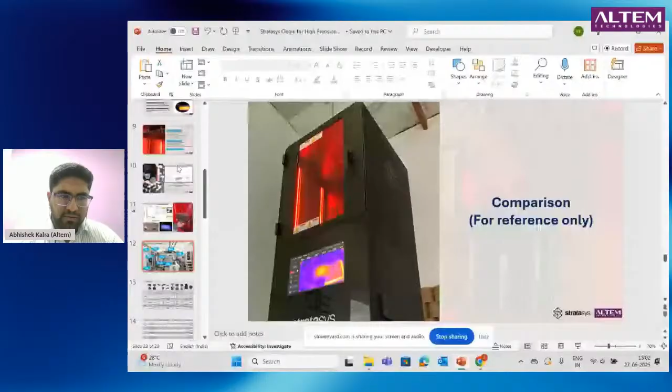All right. So typically, 3D printing or additive manufacturing has always been considered as a prototyping tool. What that means is that product designers or product engineers, before they start thinking about manufacturing and while they are still in their design iteration stage, would use 3D printing to build prototypes of these parts, concept replicas of these parts, and essentially they will look at it, analyze the look, feel, and to some extent the performance of the part, and then take a decision whether to go into molds or not.

But the industry's demand is changing, and it's changing in a few different ways. First, mass customization is the key, which means that customers are demanding a variety of products, and the pressure of bringing your product faster to the market is more than it was ever before. Second thing is that a lot of applications have emerged which cannot justify the cost of tooling. There are applications which would require customers to build 20,000 parts or 30,000 parts or even 50,000 parts, which might be prohibitive for tooling, because the cost of making a tool runs into lakhs of rupees, sometimes tens of lakhs of rupees, and the time can go up to 6 to 8 weeks.

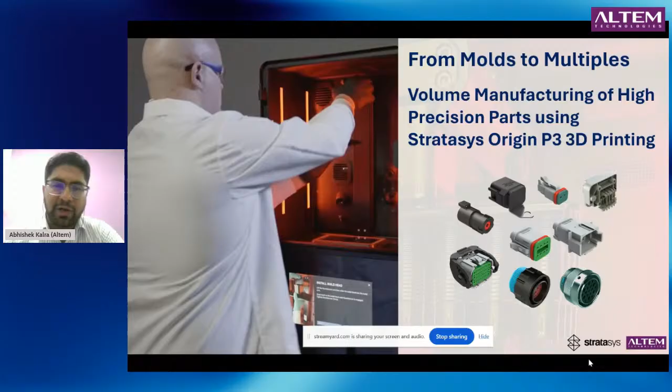So if your customer orders 300 parts, you can build 300 parts, and it doesn't matter whether you build 20 parts or 300 or 3000, the cost per part is going to remain the same.

So before we jump into what the machine does, how the technology works, and what are some of the benefits of using a technology like this and how cost effective it is to use, a little bit of introduction about us.

Altem has been a full stack, end-to-end engineering services provider for the last 15 years. We are in our 15th year of operation, and over this time we have joined hands with multiple global OEMs to help customers like you go from art to part, from concept to final manufacturing.

We have solutions which enable customers to do complete design development, analysis, reverse engineering, and then 3D printing in polymers and metals.

One of them is Stratasys, which is one of the companies that essentially invented 3D printing and is leading the revolution of taking 3D printing from a concept-stage prototype technology to a full scale production grade technology.

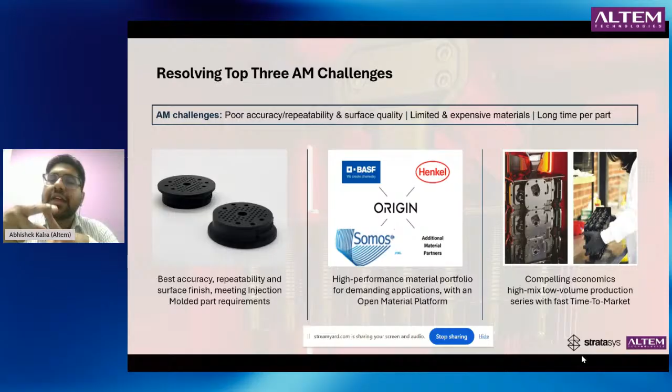And the third thing, which is very important, is compelling economics, which allows you to make the decision of building parts in 3D printing as opposed to going to injection molding, because you get the same quality, same properties, and more importantly, the same cost or similar cost and time benefits that you get with traditional manufacturing.

I will play a short video which just gives you a basic overview of the machine.

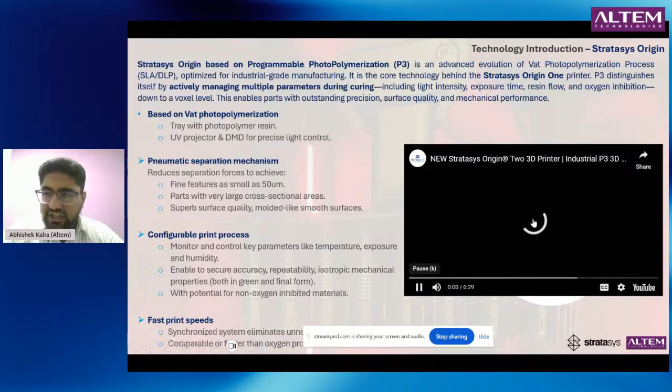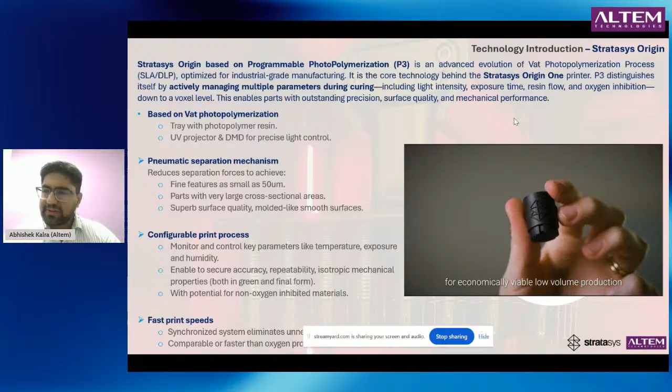Introducing Origin 2 3D printing solution, where repeatability meets unmatched accuracy, a true injection molding alternative for economically viable low-volume production. One printer, infinite applications, every industry. Stratasys Origin 2, precision manufacturing, redefined.

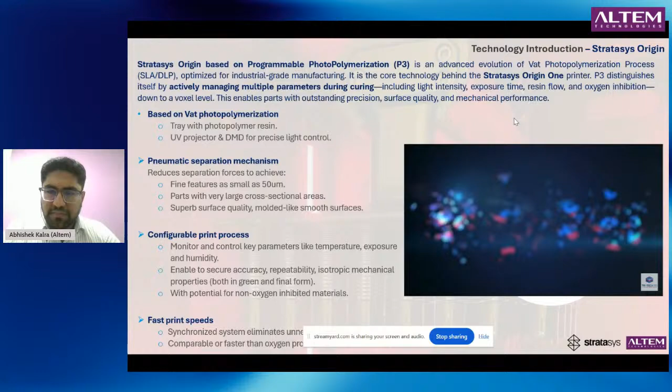All right, so that gives you a little bit of a gist of how the technology works. Essentially, as many of you may know, resin 3D printing or DLP 3D printing - the programmable photopolymerization methodology is an addition or an upgrade to the typical standard DLP.

And for those of you who know DLP or not, DLP printers are great because they can produce very good looking parts, but they are generally suitable only for prototyping because, A, it's slow - it's generally a fast technology, but it is slow as compared to what the industry calls production standards. Second, the number of raw materials is very limited to basic materials because DLPs are typically low cost processes. And third, a lack of repeatability. So it's great for prototyping, but not so good for production.

And number four is parts changing physical mechanical properties over time. So you measure a DLP part today, it'll be, let's say, with an accuracy of 50 microns, and 3 months later, because of the atmosphere itself, it would have warped or deformed.

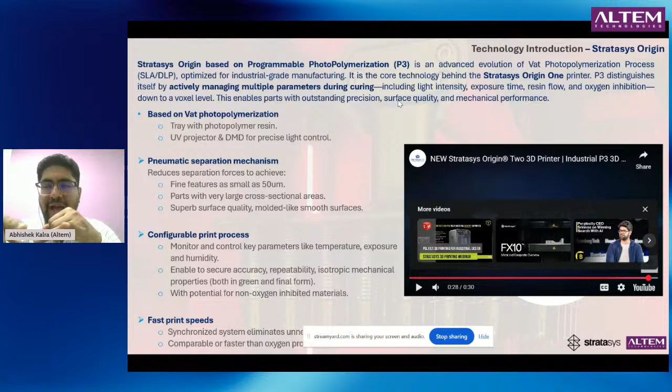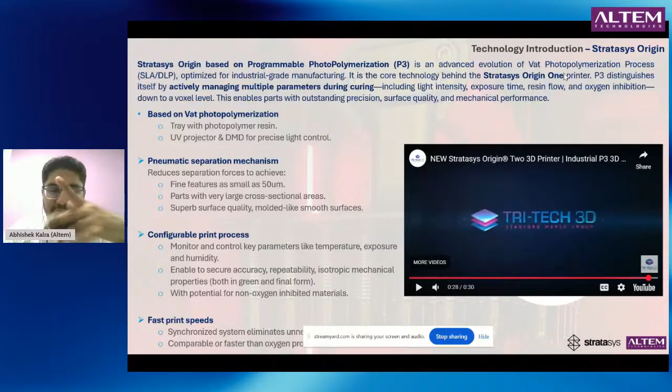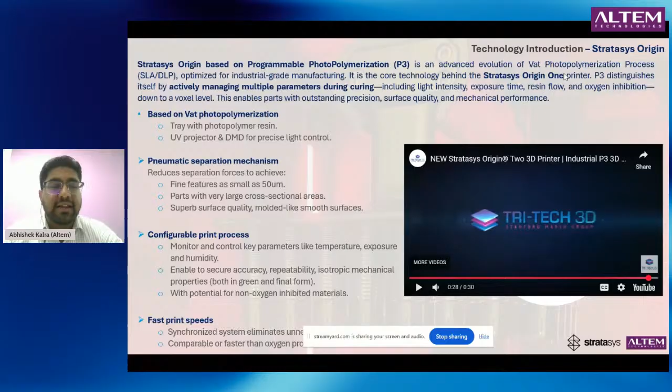Origin allows you to essentially take the benefit of a DLP process, which uses resin material to produce high surface finish parts. But due to its process control and heat control inside the chamber, Origin allows customers to build parts in 50 plus different types of materials that are known today, which includes materials with temperature capabilities of close to 400 degrees centigrade, ceramic infused materials, carbon fiber based materials, as well as injection molded quality close to 50 micron accuracy and close to 3 micron resolution.

What we do differently as compared to traditional DLP systems or traditional SLA systems is build a lot of process control, which is what Stratasys is famous for. So we could make the chamber of the printer absolutely inert, which allows us to build parts with much more sensitive materials, unlocking potential for non-acrylic chemistries.

So those of you who know DLP, people are only able to use acrylic-based materials. We can control the chamber process and the bed chamber, meaning we can heat up the build chamber in which the parts are printing to a level that we want, as well as gradually increase or create a temperature gradient.

We can manipulate exposure time, that is the duration of time for which the image is being projected onto the resin, and we can manipulate the delay settings in the software. We have a lot of built-in sensors which measure the complete properties of the chamber and make sure that every layer is printed perfectly so that the next layer is printed perfectly, and so on and so forth.

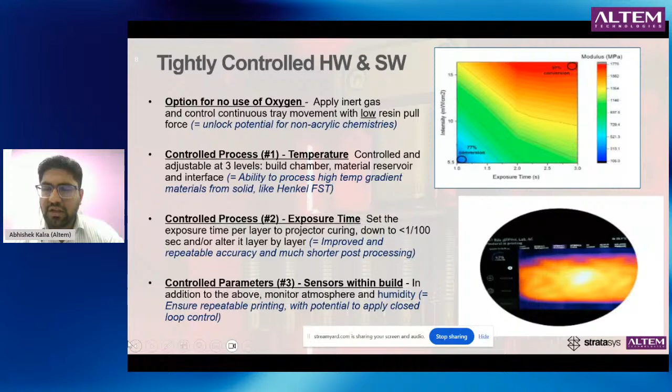Using this process we can create parts with surface finish of close to 3 micron RA, which is very close to injection molded finish, as well as create very tiny features, very tiny textures, but all the way up to large parts without any type of warpage.

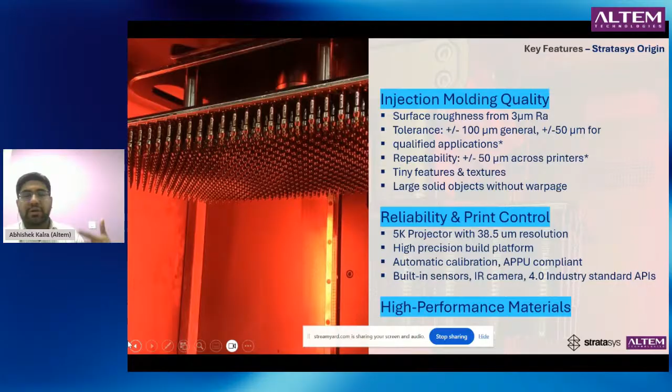And we are not just saying this, we have got ISO certifications done on this process. You can access from our website a document which shows repeatability studies of this platform, which allows it to build consistent parts across builds, across different positions at the build, and across machines.

So whether you print a part on the left corner of the machine and the same part printing on the center of another machine, and the third one on the right corner of a third machine, they will all measure the same up to 98.5% across build platforms and about 93% across printers.

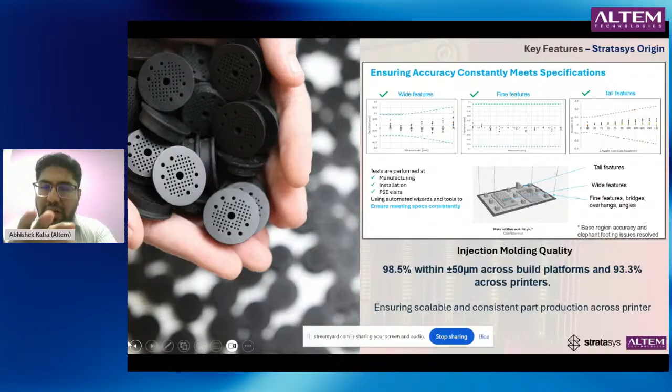We are one of the only people in the industry who are able to achieve this level of repeatability, so that when you as customers give 10,000 parts to your customers, you know all the parts are performing well, and they are performing well always.

What we are able to do is take the benefit of the fact that we can produce injection molded level quantities, and also give you injection mold level materials. Today on the Origin platform we have close to 40 different materials readily available between us, that is Stratasys, and some of our material partners, such as Henkel, Somos, BASF, which is now called Forward AM.

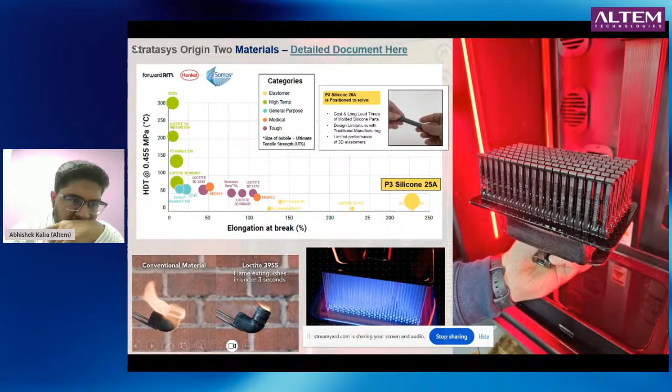You can see on this graph we have some basic materials which are biocompatible in nature, all the way up to this material called 3955 from Henkel, which is an FST approved, fire resistant, aerospace grade material.

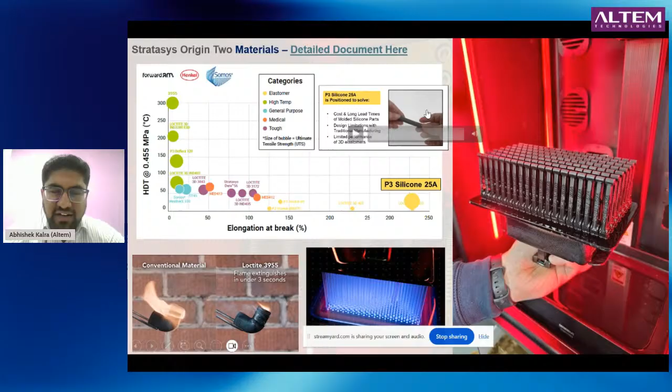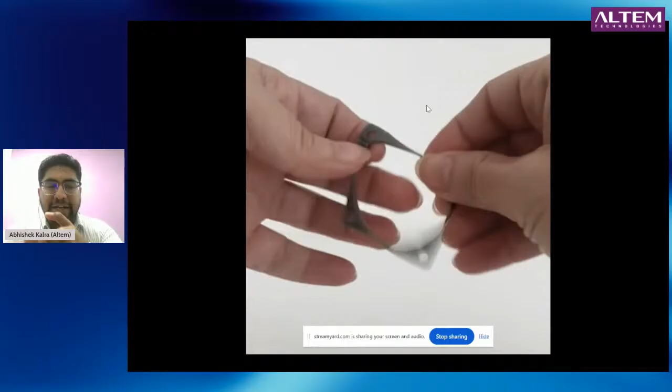We are also launching this month the world's only and pure true silicone material, not silicone-like, not silicone-mimicking, purely silicone, which can give you some very interesting results. I'll play a video, you'll start to see it on your screen in just a minute. We are able to print ultra-soft flexible parts, also biocompatible in nature, which allows you to create things with silicone that are typically very difficult using injection molding.

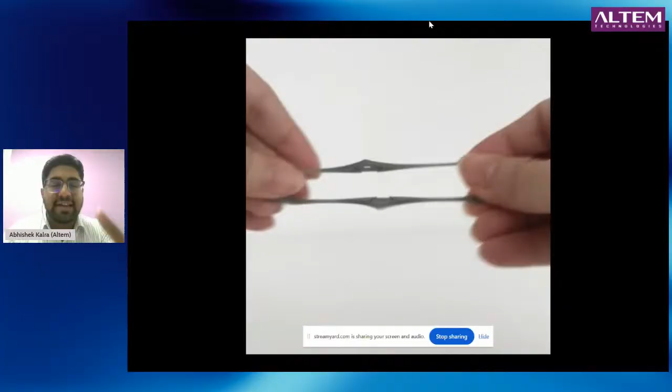So if I want to make 20 parts, 50 parts, or even 5,000 parts, I can just stack them on the build platform and start using my parts from the same day or the next day onwards.

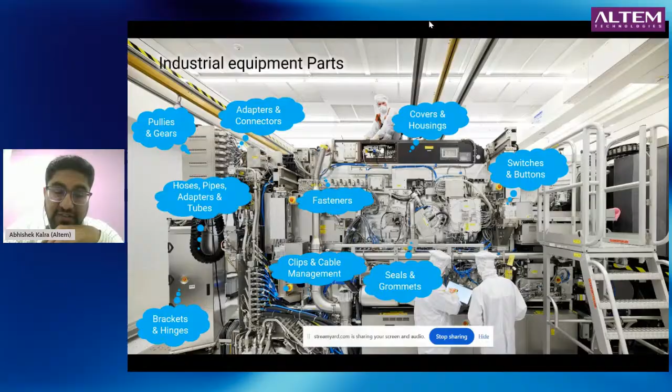Using this, any typical scenario you might expect in a product or process, such as this image of a typical factory showing brackets and hinges, hose pipes, adapters and tubes, pulleys and gears, connectors, fasteners, cable management systems, switches and buttons, can all be directly 3D printed.

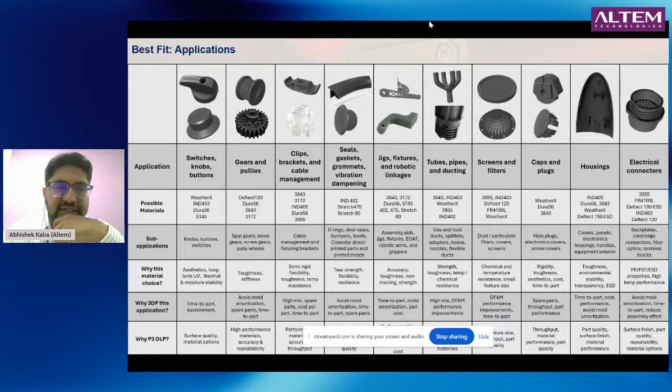We found some key applications, and these applications are typically possible with a wide variety of materials. So if you go on our website, and we'll put links in the description, you will find a list of materials and what properties those materials offer, and more importantly, what materials they are similar to.

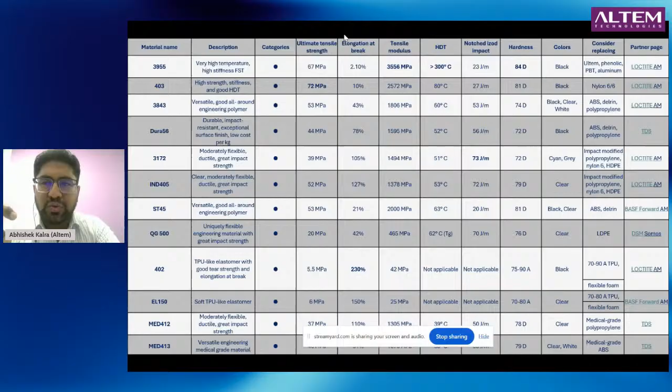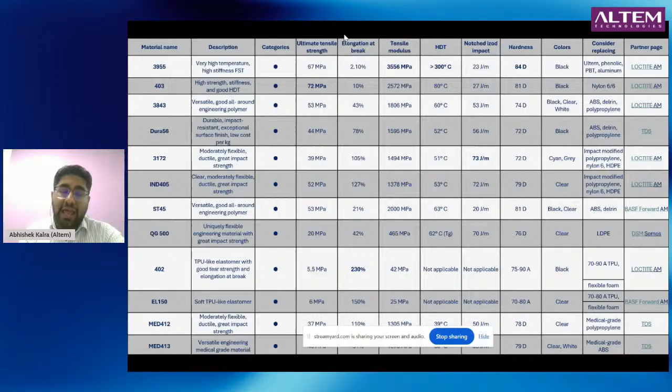For example, 3955 is similar to Ultem or PBT, and if you talk about stiffness to weight and strength to weight ratio, it can even give you better performance than aluminium. Origin gives you access not only to materials developed by Stratasys, but also to materials developed by larger third-party suppliers.

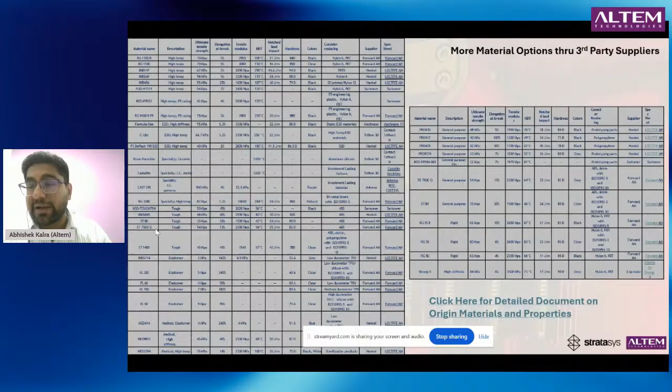It's a very complex slide, but we have companies like Henkel, BASF, and Forward AM, who are developing tens and up to hundreds of materials, including biocompatible materials, castable materials, and of course carbon fiber and fire resistant based materials, which can be used on the platform to build parts with the characteristics that you and your customers want.

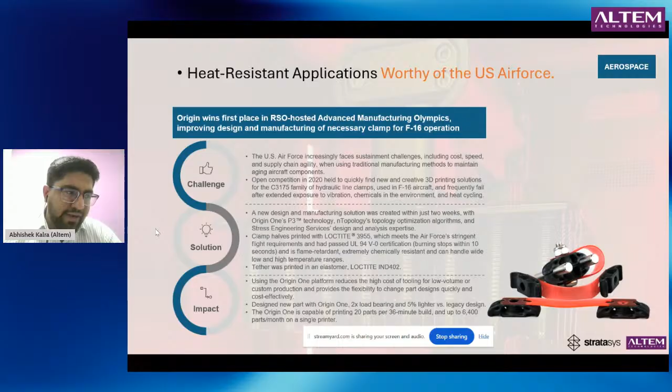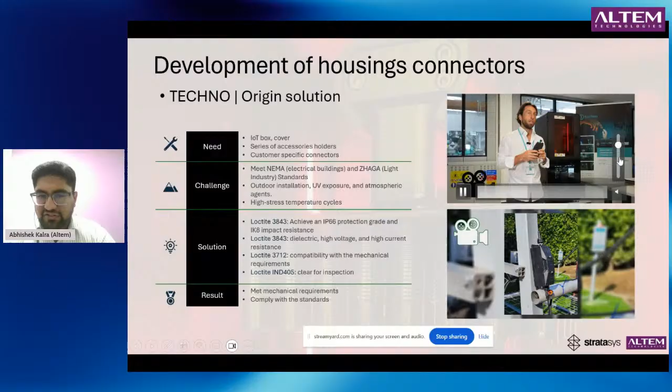We have success stories from aerospace, where we already have FST grade UL94 V0, that is fire resistant materials, directly available. As well as, if you look at this video from a connectors manufacturer, you can see how precise connectors are manufactured straight out of the Origin machine and used directly in the process.

And remember, these parts are as strong as it can get, compared to injection molded plastic or even machined plastic, and the parts will last you for the entirety of their life.

Now I've been talking about how you can build this in very large volumes, so let's try to quantify the large volume. I've taken a simple example of a connector, which is a very small but very complex geometry, about an inch by inch part.

As you can see, we can fit close to 400 parts on the build plate. If you can see my camera, this is how the build plate typically looks. You can stack parts on top of each other by putting some minimal supports on top, and that's how you can utilize the complete build volume, which is a good 400 height of the printer.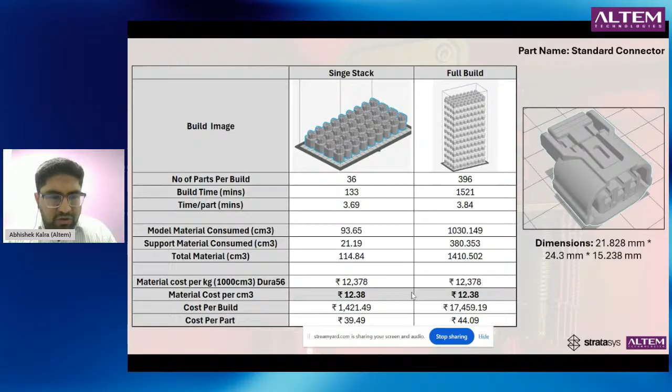And if you notice, the time taken per part is less than 4 minutes. The cost per part could vary depending upon the material, but using a general purpose high flexibility prototyping material, we are able to build this part for about 40 rupees. So it's a very compelling economics when you don't have to invest in tooling, you don't have to invest in labor, and you don't have to wait 6 weeks for your parts to get ready. Just imagine, it takes 400 parts in about 12 hours.

You can build 800 parts per day, or some 12,000, 24,000 parts per month, and so forth. This is the amount of volume you can build, and this could also mean you're replacing parts till the time your injection molds are getting ready, which will give you tens of lakhs of parts. You can build the first 20,000, 30,000, 50,000 parts on the injection mold.

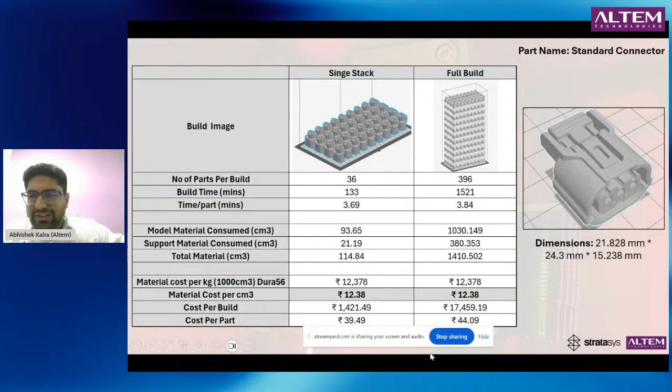Or you have a customer who is looking for a small order, because maybe they are trying out a new product or a new market, or it's a startup. You can build high precision parts, and every part on the stack will have the same level of repeatability.

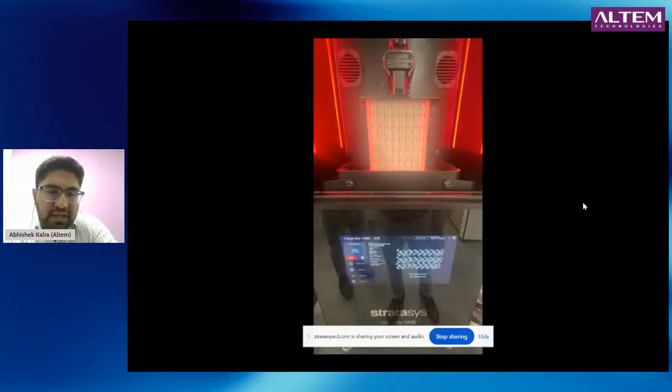As you can see from the video, it should be up on your screen if it's not just yet, showing how these parts are building inside the platform.

Very beautifully done. It takes about 12 to 14 hours to finish this job, and at the end of 14 hours, you can have close to 400 parts with you, which are ready for deployment, ready for production. With that, I come to the end of my short presentation.

Origin is perhaps one of the most fascinating 3D printing technologies available in the market today, due to its ability to produce these kinds of parts in these kinds of volumes.